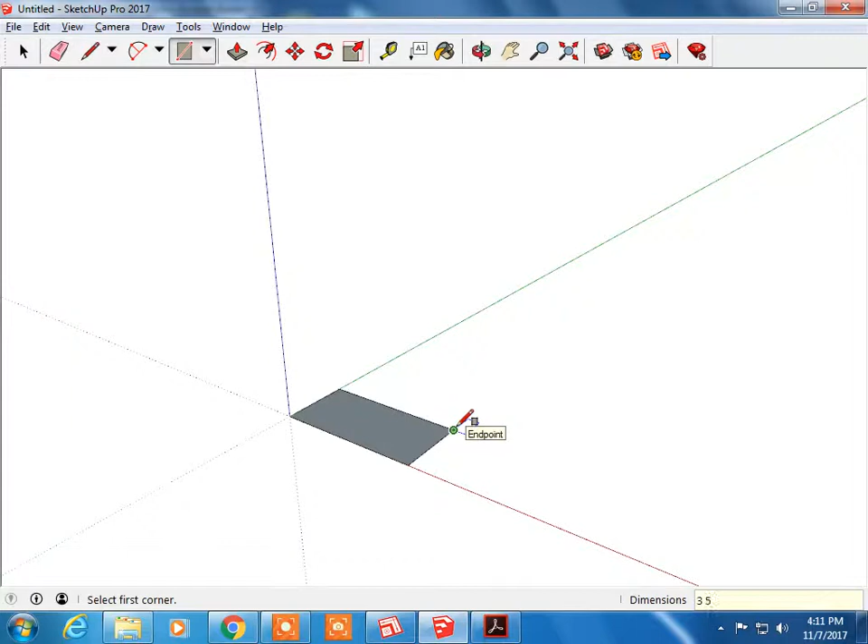So getting back to the modeler, I'm going to select this person. I'm going to pick up my rectangle tool. I'm going to describe a rectangle that's 3.5 inches long by 2 inches wide. So you see it's pretty small. I'm going to zoom in on it. I'm going to check the height of the object. The height here is 3 halves, which is 1.5 inches. So I'm going to take push-pull, and I'm going to pull this up 1.5.

Now, getting back there, there's a few more details I need to do. I need to cut this U-shaped channel out. I'm going to subtract it away. So we've got 3/4 inch flat on this side, a 1/2 inch flat on that side, and it's 3/4 of an inch in depth. So back to the modeler.

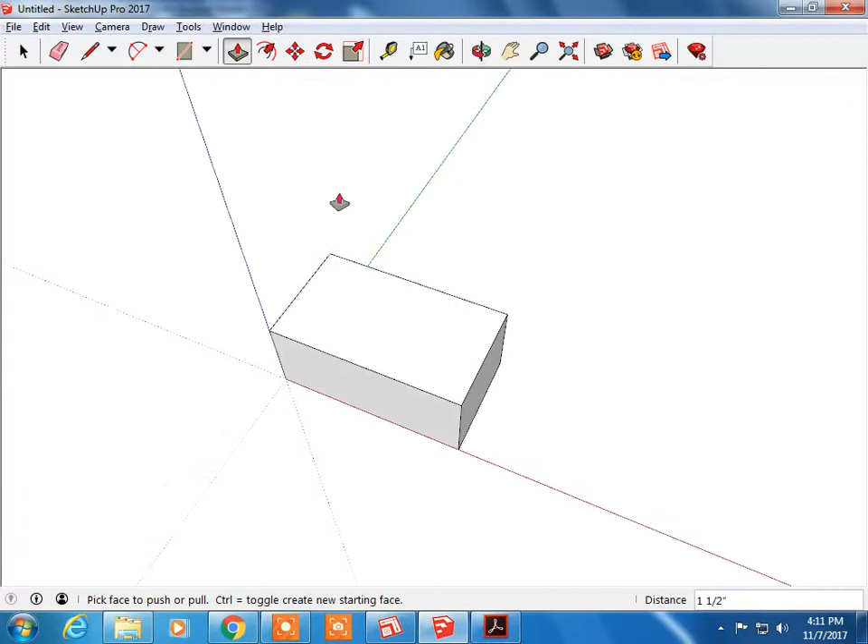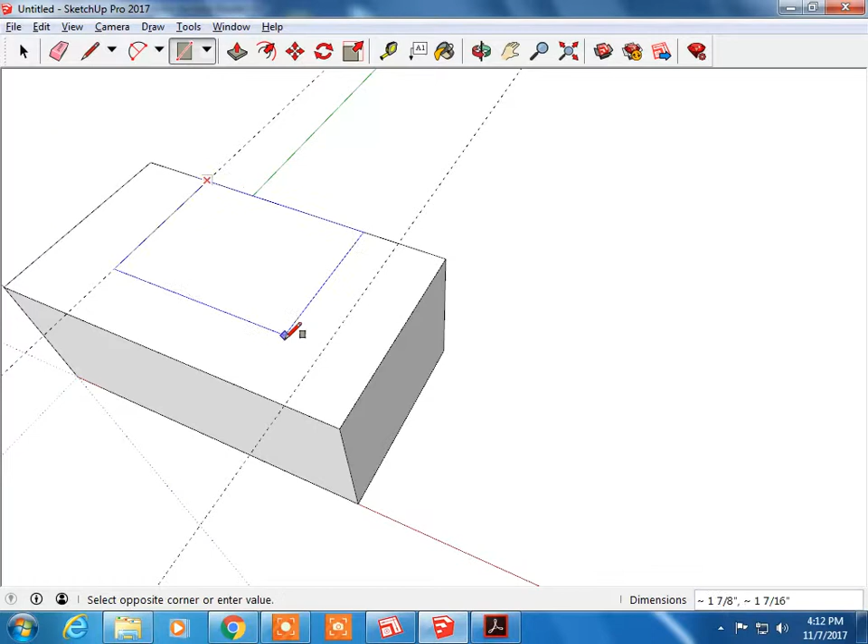I'm going to take my guideline tool, 0.75, and I'm going to go this way 1/2. I'm going to redo that guideline. Okay, rectangle tool. I'm going to describe a rectangle where the guidelines are. I'm going to pull this down 0.75 or 3/4.

Okay. Now, next step, taking a look at the cutout here. I can see this cutout is 1.5 inches long by 3/4 of an inch deep. So I'm going to go ahead and take a guideline tool, measure over 1.5, draw a line in this position right here. And then I'm going to push-pull back 0.75.

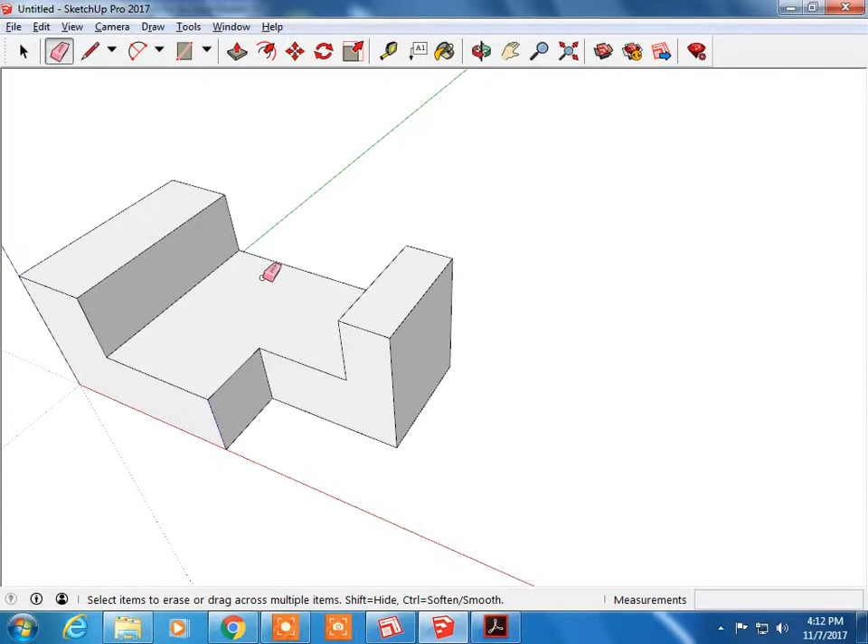Okay. Last set of details we have to do is the holes. I take a look back on my drawing. The holes are a 1/2 inch back, a 1/4 inch here, a 1/4 inch to the hole center, same way over here. So my center hole center, which is what I'm going to describe, is a 1/2 by 1/2. So back to the modeler, take my tape measure tool, back a 1/2 inch, this way a 1/2 inch.

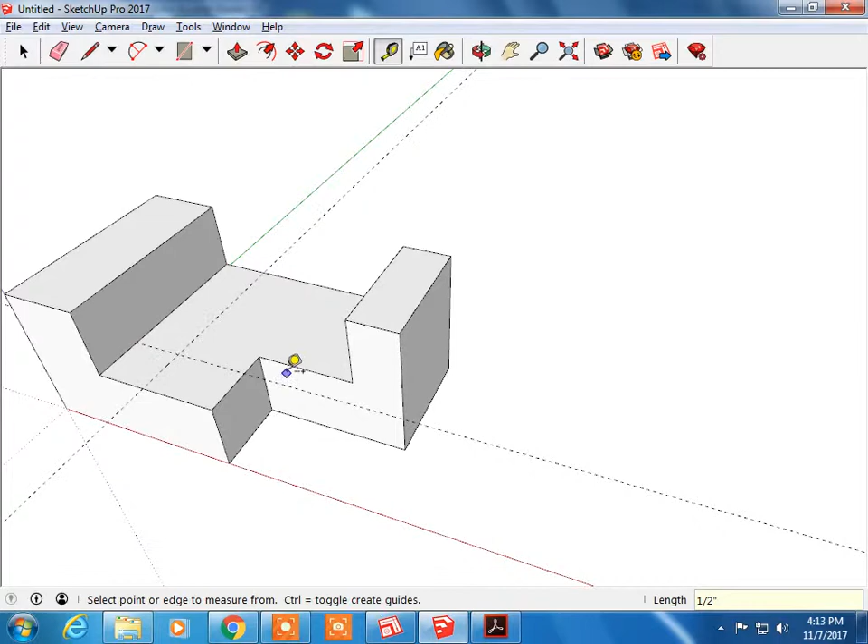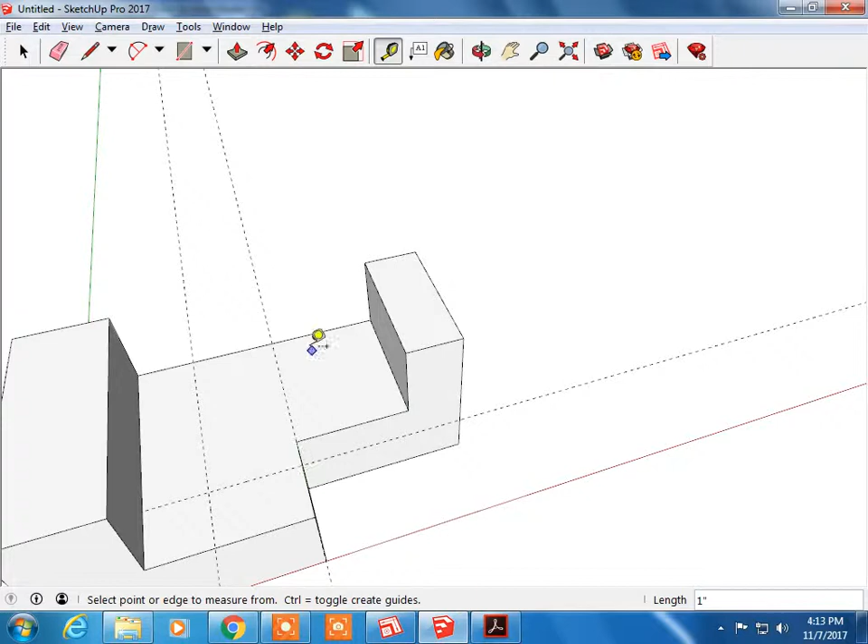Looking at the other hole, I need it to be centered on this cutout and a 1/4 inch from the back edge. So I'm going to go ahead and take this, line it up with this edge right here, and describe another guideline 1 inch back from the back to front. Now I'm going to switch over, get my circle tool, and I'm going to draw the circle in the right spot.

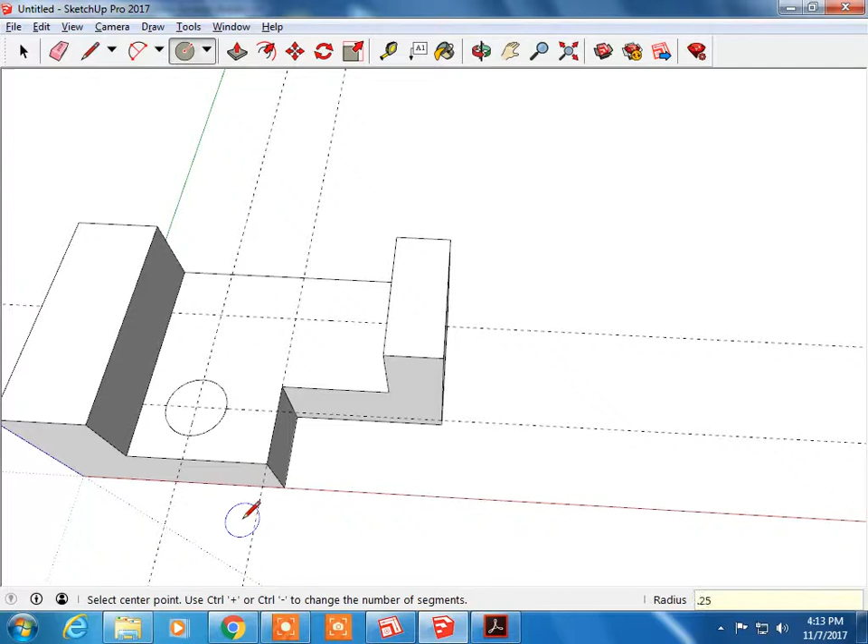It's here in the front for the frontmost, and the radius on that is 0.25, and the radius on the second one is 0.25. And then once I get those set, I'm just going to go ahead and erase these guidelines, and then I'm going to use push-pull to push this underneath right on the face, and I'm going to do the same to this side.

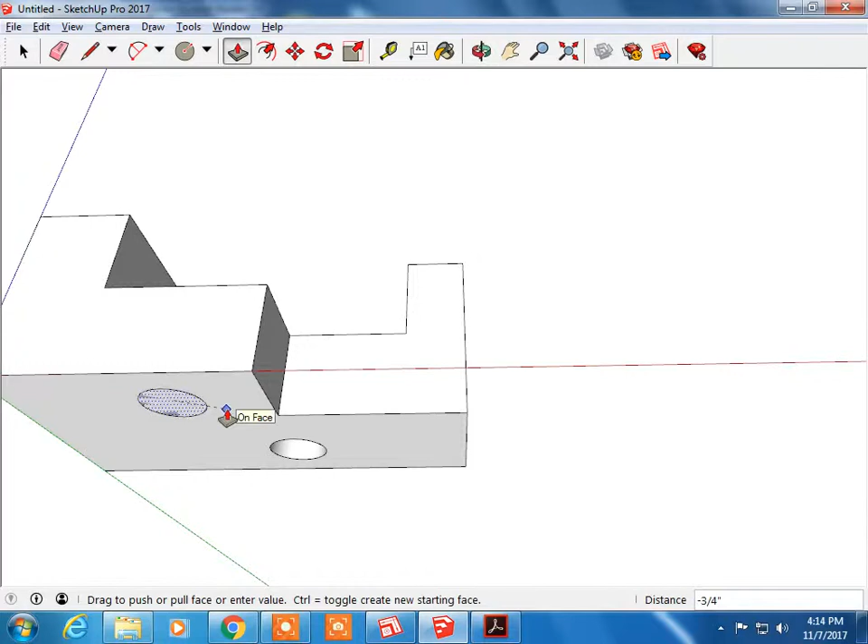Alright, just to finish up here, I'm going to need to do view back edges and view hidden geometry, and then I just need to save.